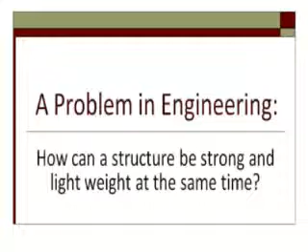The title of this presentation is A Strong and Light Structure from the Quran. Now, the title of this presentation stems from a problem in engineering. Now, this problem is that engineers, when they want to have a strong and stiff structure, they always end up with a heavy structure. Let me give an example.

Suppose an engineer wants to increase the strength of a car, of the framework of a car. He ends up with a heavier car because he uses heavier materials in the construction, because a heavy material is a stronger material. And this is a problem. Why? Because when you have a heavier car, it consumes more fuel, and there is a phenomenon called self-loading, which means that the car itself puts so much stress on itself due to its own weight. And so it's a problem.

So engineers dream of a structure that is strong and stiff and at the same time light. And in engineering sciences, there is no solution for this problem till this day. But I'm presenting here a solution for this problem from the guidance of the Quran, the last revelation of Allah God to people. And the key to find the answer to this problem, we can find it by pondering upon verse number 7 of chapter 32 of the Quran, which reads, "Who perfected everything He has created, and He began the creation of people from mud."

So here Allah God Almighty is telling us that He perfected everything He has created. And in engineering terms, this means that every system in creation is an optimal system, is optimized, meaning the best utilization of energy and matter. So linking this by pondering upon load-bearing structures in creation, like for example human bone, we see that it's strong and stiff, and at the same time it's very light. These are load-bearing structures in creation.

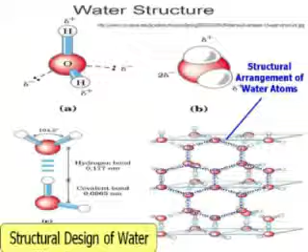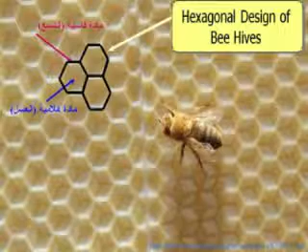So if we start by pondering upon the structure of ice, water, we see that it has a hexagonal internal design. So what you can see on the screen is the basic structural unit of water. We have 6 sides supported by 6 links. And this basic unit we can find also in the design of beehives. The way Allah Almighty created beehives, we see again we have a hexagonal cell supported by 6 external links. And also in wood material the same, we have hexagonal cells supported by 6 external links.

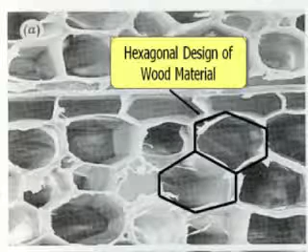So what we end up with is that the basic structural unit in creation is the one you can see on the screen, 6 plates supported by 6 external links. Now, again, the fact is that beehives, human bone, wood, they're all light structures but at the same time very strong and very stiff. So the answer to how these structures can be strong and stiff and at the same time very light is found in the study of this basic hexagonal structural unit of creation.

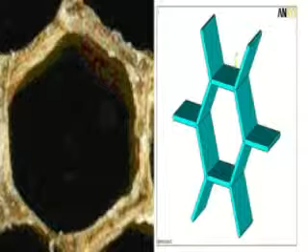So if we start studying this basic structural unit of creation, and just for comparison purposes, I want to compare its performance with a typical structural unit currently utilized, which is the square and rectangular sections. For example, the room you are sitting in may have a square or rectangular design. So I want to compare the performance of the hexagonal basic structural unit of creation with the typical structural units used in construction nowadays.

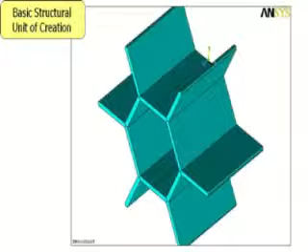Now, firstly, the hexagonal basic unit of creation, since it has a hexagonal shape, it can cover maximum volume with minimum amount of material. Suppose you have certain structural plates and you want to cover the maximum volume or the maximum area with the minimum amount of plates.

The hexagonal shape is the best one to do that. So since you are covering maximum area with minimum amount of material, you will have a lightweight structure. That's the first advantage of using hexagonal arrangement rather than square or rectangular arrangements.

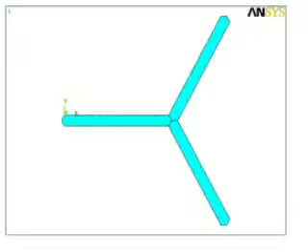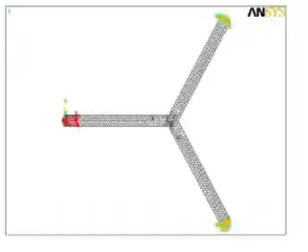Secondly, if you look at the links between the plates, here is the link between three plates in the hexagonal design. Now this link, if we test its performance by applying a compressive force from the left, as you can see with the red arrows, and fixing the ends on the right, this compressive force will yield a maximum displacement in the link of about 34 micrometers.

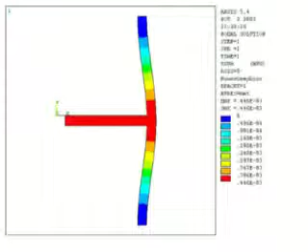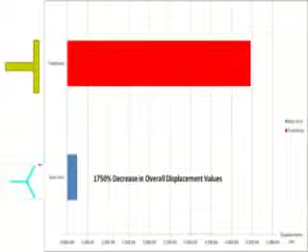And if you apply the same compressive force to the typical sections used nowadays in construction, it will yield a maximum displacement of 464 micrometers. So in the hexagonal design, the displacement was about 34 micrometers. Here we have 464 micrometers. And if we put the two values on a bar chart, we see a huge difference between the displacement value in the traditional sections indicated by the red rectangle, and the displacement values in the hexagonal arrangement indicated by the blue rectangle.

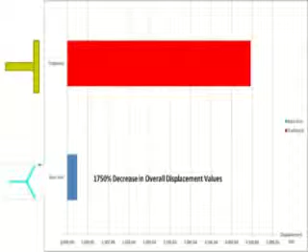So you see that the hexagonal design has far smaller displacements than the typical square sections, which means that the hexagonal design is stiffer than the square arrangement. And that's what we are looking for, a very stiff and strong design.

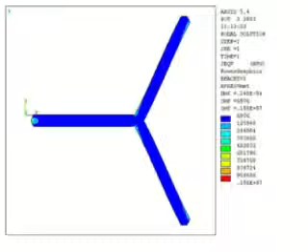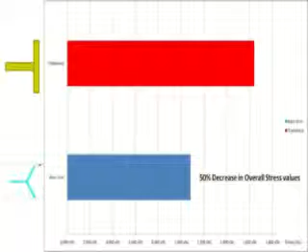Also, if you look at the stresses produced in the section, in the hexagonal arrangement the maximum stress is around 1 megapascal, 1 million units of stress, and in the typical section it is about 1.6 megapascals. Comparing the two values, we see a 50% decrease in overall stress values in the hexagonal design compared to the traditional sections. So the stress produced in the hexagonal shape is smaller, which means that you can apply more force or more load to the hexagonal design before it reaches fracture point.

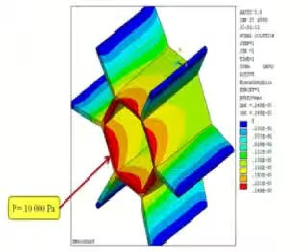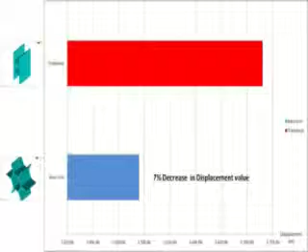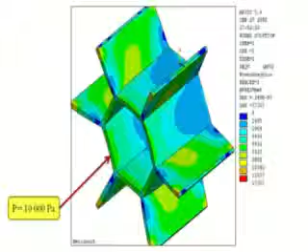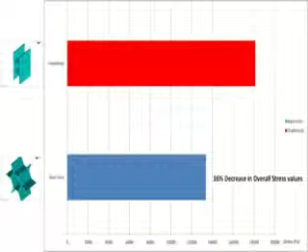And also looking at the stress values, under a pressure of 10,000 pascals, the hexagonal design yielded a maximum stress of about 13,361 pascals, and in traditional sections we have 18,133 pascals. So there is a 36% decrease in overall stress values in the hexagonal design. This means that the arrangement of structural units in a hexagonal design yields a stiffer and stronger structure compared to the traditional design using squares or rectangles.

So linking everything I've said so far, the hexagonal design can cover maximum volume, maximum area with minimum amount of material, and it's stronger and stiffer than any other design. This means that the engineering problem is now solved. We can get a strong and stiff design by arranging the structural units in a hexagonal design, a strong and stiff structure that is yet light in weight.

Let me give a practical example of this. The room you are sitting in, instead of having the walls in a square or rectangular pattern, put them in a hexagonal cell. In this case, you can use less structural material and end up with a stronger and stiffer design, which is the aim. This is the optimal system: strength and stiffness with light weight. So we see, brothers and sisters, how from the Quran, the last revelation of Allah to people, we get the answer to a question that eluded engineers till this day.